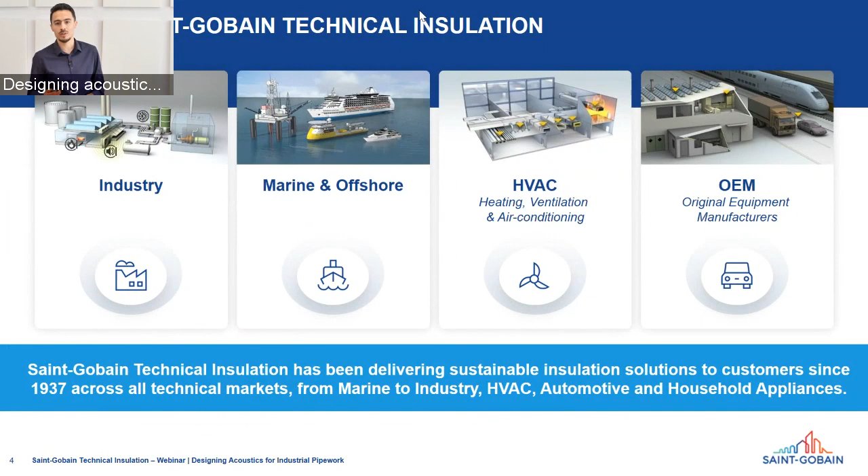Okay, let's start this webinar by introducing our technical insulation central team. We deliver insulation solutions to customers since 1937 across all technical markets, from marine to industry, HVAC, automotive, and household appliances. Today's webinar will focus on the industry sector, but webinars are coming up for all our different markets, so please stay informed through our social media to receive the latest information.

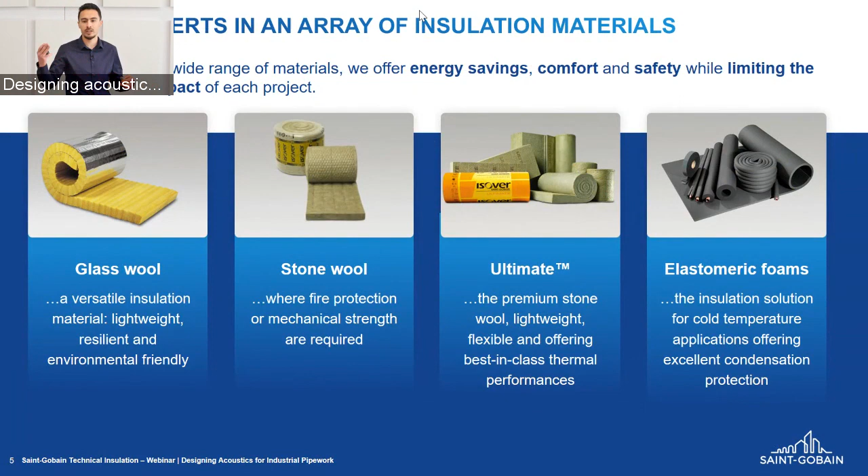We have an expertise in a wide range of materials with a multi-material offer, from glass wool, stone wool, but also our premium stone wool Ultimate, which is lightweight, flexible, and offers the best-in-class thermal performances. More recently, we have integrated elastomeric foam inside our portfolio, which allows us to cover all temperature ranges observed in the industry area, from cryogenic temperature to very high temperature up to 700 degrees.

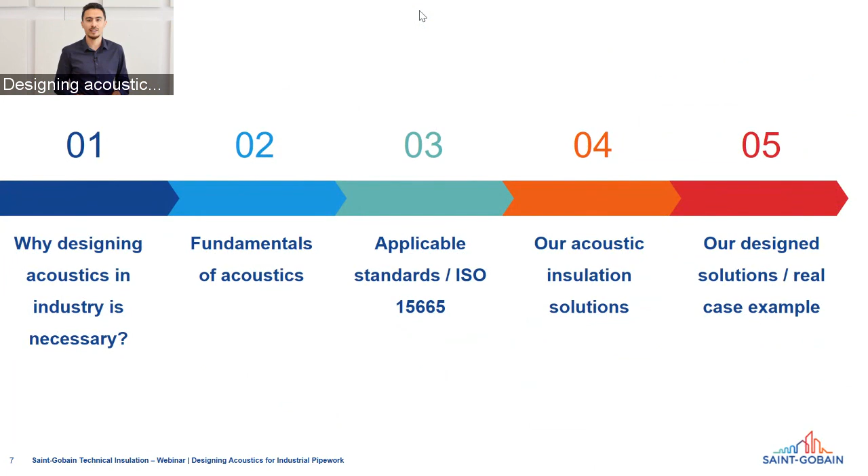Let's discover today's agenda. Parts 1 and 2 will be mostly dedicated to giving you the context of noise control in industry and also some fundamentals of acoustics. Then we will jump directly to the widely known standard ISO 15665. To conclude this webinar, the last two parts will be the right time to share our design solution, but also a concrete and real case study specified by my colleague Edward. I let the floor to my colleague Edward, who will give you more information about acoustics and the fundamentals of acoustics. Edward, the floor is yours.

Thank you, Fabien, for this introduction. Let's start with some first principles. We talk about sound and noise. What is sound? I think everyone recognizes what sound is - listening to good music or watching a concert, it's pleasant to hear and you have a pleasant sensation. But sound can also be annoying, and it can cause an unpleasant auditory sensation, or a badly perceived sound, and then we call it noise.

But why do we have to regulate noise, especially at the workplace? Because if you are exposed to too much noise, it can affect your health - for example, hearing problems or increasing your heart rate. If you are in a too noisy area, it's hard to communicate with each other, not only with talking and speaking, but also you may not be able to hear detection of danger signals, which is quite important in industrial areas. So in general, a noisy area leads to acoustic discomfort, which is tiring for human beings.

So next slide, please.

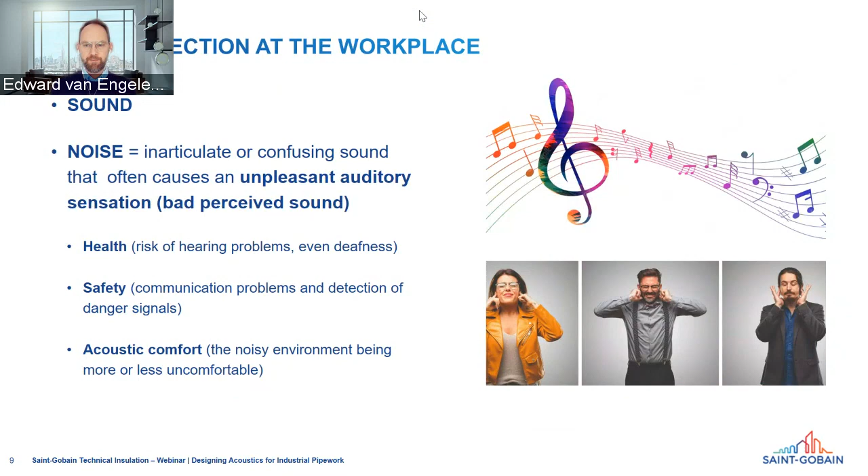So here's an example how to regulate. What are the regulations to control the noise? This is an example from the European Union, which tells us there is a European Union directive which stipulates 3 stages of control of the noise exposure limit in the workplace. It regards the average noise exposure levels to employees, mainly during a specific working day or week.

And there are 2 levels: a level of 80 dBA and 85 dBA. If your exposure level is below 80, you don't have to take measures. Of course, it's possible, but you are not forced to.

If the exposure level is between 80 and 85, then you're in the area of the lower exposure action value, which means you have to take some actions. For example, you have to provide hearing protection to your workers. They are not forced to wear it, but you have to provide it. Another thing you have to do is health monitoring of your employees, at minimum on a 5-yearly basis.

If your exposure level is above 85 at your own workplace, then it's mandatory for the workers to use and wear hearing devices. Some extra actions are also taken into account, which means your health monitoring is not on a 5-yearly basis, but on a 3-yearly basis as a minimum. And you have to place signposting in the noisy areas in your plant or factory.

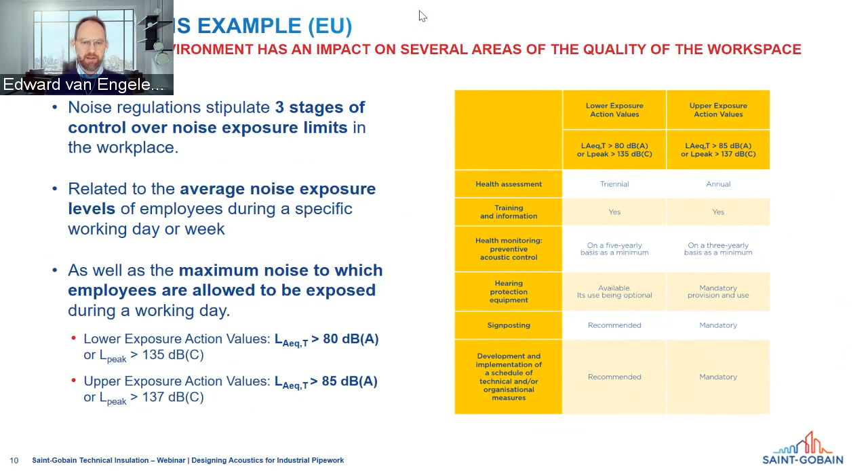The second thing we have to take into account is environmental noise. The European Union has also written a directive to assess and manage environmental noise, which means noise emitted by major sources like road and rail vehicles, infrastructure, aircraft, outdoor and industrial equipment, and mobile machinery. This directive is used by the different countries in the European Union, and it's the base for local legislations which they make in their own countries.

For example, it describes how to use it, such as the exposure period in the day, night or evening. There are maximum exposure levels during these periods, as you can see in the blue field, and noise level exposure from a factory to the surrounding dwellings will not exceed 45 dBA in the evening and at night. So if this level is exceeded, the factory needs to take measures to reduce the exposed noise.

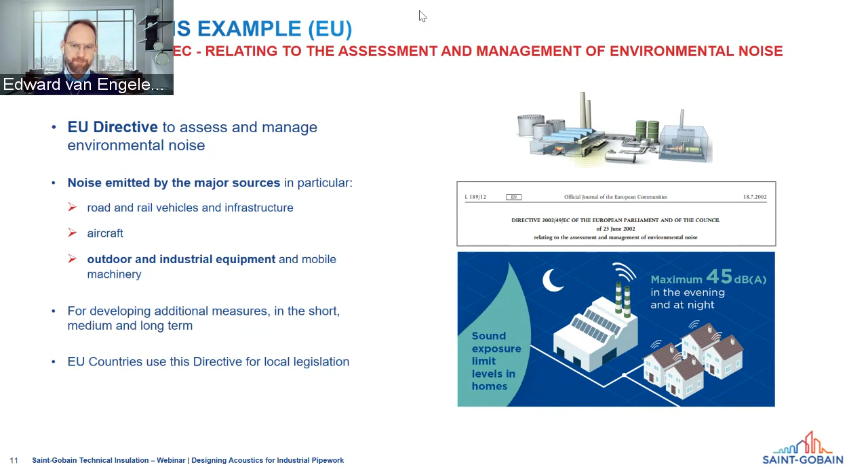So let's step into industry. How to control the noise in industry. The first thing we can consider is controlling noise at the source. The second is controlling noise along the propagation path, and the third one is at the receiver.

It's preferred to control the noise at the source, which means if you have already taken your noise control measures into account at the design stage, you have less chance of needing measures along the propagation path or at the receiver. So if you have to specify equipment, take into account the sound power levels of the equipment, that kind of thing.

If you look at noise control along the propagation path, we talk about airborne noise and structural noise. To control airborne noise, for example, you can relocate the source or place an enclosure around it, add silencers, or absorption treatments in a room, and so on. For structure-borne noise, you could place vibration insulation under machinery, floating floors, that kind of thing.

The last one is noise control at the receiver. That's the last option you can take if measures at the source and along the propagation path are not possible. The most common one is personal protective equipment or hearing devices for your workers. But you can also decide to place a personal protection cabin in a noisy area in which the workers can sit and take rest or do their job.

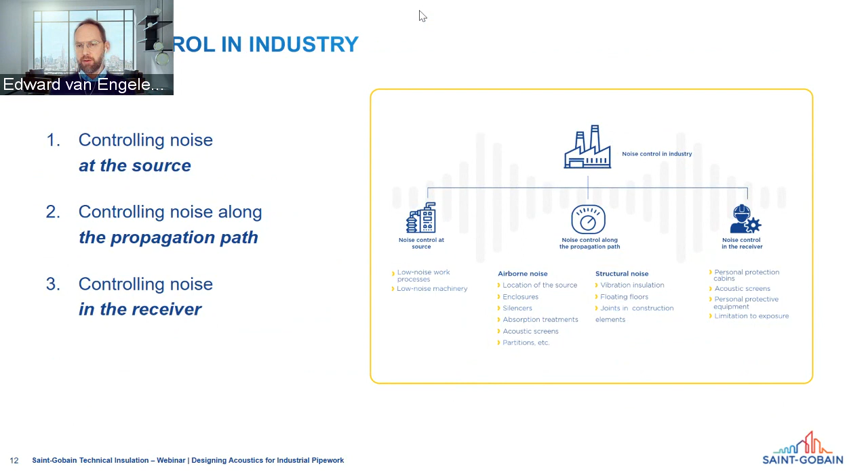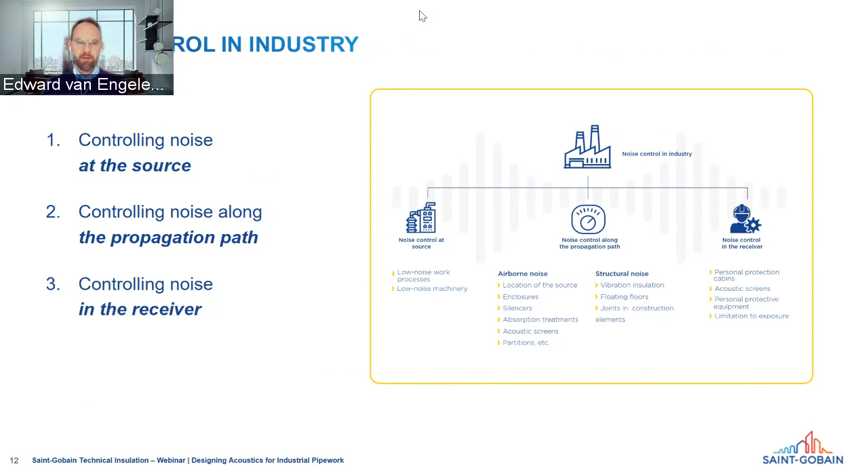Regarding the topic of today, noise control of pipes, it could be in two ways: noise control at the source, which means you are in the design stage of a project, or noise control along the propagation path, which means you have an existing project with a noise problem and you have to place an insulation system around an existing pipe. It's not so important which way, but just to be clear.

So let's start with some fundamentals of acoustics. These are some parameters which are coming up in this webinar later on.

Sound propagation speed, that's the speed of sound in a medium, for example in air, then the speed is 340 meters per second. Amplitude, it's the difference of the pressure.

If you look to the right figure, the yellow one, you see a horizontal line, which means it's the ambient static pressure around us, and you see some waves written on it. On the left side, a low frequency sound wave, you see a long wave, and on the right side, a high frequency sound wave, short waves. And if you look into this figure, you see the amplitude, and the amplitude is the height of the wave. It's the difference between the ambient pressure. The higher the amplitude, the louder the sound is.

And if you look to the wavelength, that's the length of a wave. That's called lambda, and the longer the wave, the lower the frequency sound is. For example, a drilling machine or the beat in music. And if you look to the right picture, you see more waves, shorter waves, which means it's high frequency sound, like someone blowing a whistle, that kind of thing. That's the high tones. In acoustics, we don't use the wavelength to present the tones.

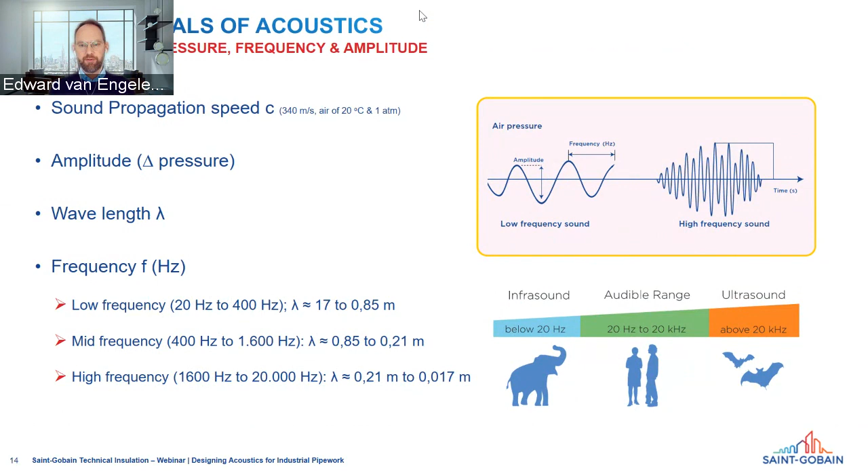Next is the dB level scale, the decibel level scale. Why are we using this? Not only the range of frequency is a big reason, but also our human hearing range. Our ear can hear very little pressure differences to quite high pressure differences, from 10 micropascal to 100 pascal, which means that's a scale of 1 million times. That's a very large scale, and too large to make proper calculations.

That's why the logarithmic scale is introduced, which means to obtain the sound pressure level, we take the real pressure, divide it by a reference pressure, then take the logarithm, and multiply by 20. That gives us the sound pressure level. The reference pressure is 20 micropascal, which is the sound pressure of the auditory threshold of human beings.

If you look to the figure on the right side, as I'm talking now, I think I'm producing around 50 or 60 decibel sound pressure. And if you go up in the figure, you see a starting jumbo jet, then we talk about approximately 130 or 140 decibel, which is quite high and also above our pain threshold. If you are faced with levels above 140, you have a serious chance of losing your hearing system.

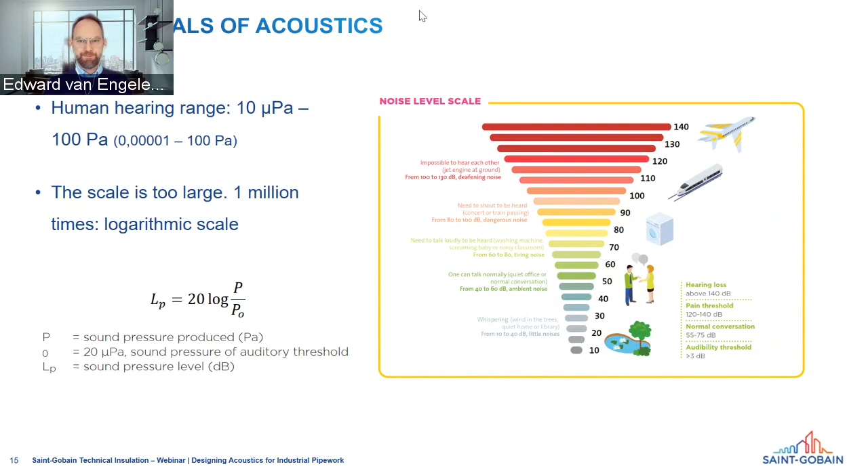We already told that our frequency range is from 20 to 20,000 hertz, which is quite a big scale. If we could only measure frequencies with this kind of big scale, it's very difficult to handle, to make calculations, and to make it viewable. That's why the octave band is introduced.

Octave band is a frequency range defined by a center frequency, and the noise is divided into different octave bands. If you take a look at the left corner, the octave band spectrum, you see from 31 Hertz to 16,000 Hertz an octave band spectrum, with only 10 bars, which means you have a clear picture of the sound pressure level in this figure.

The center frequencies are the numbers on the horizontal scale, for example 125 Hertz, and there's a relationship of 2 to 1 between them, which means the next center frequency is 250, 500, 1000, 2000, and so on.

It gives you detailed information about the different frequencies or tones in a sound spectrum. If you want more detail, very often the 1/3 octave band is used. It's basically dividing the normal octave band by 3, which gives you more information. In this case, it's the same spectrum, but now it's divided into 30 bands, giving more detailed information.

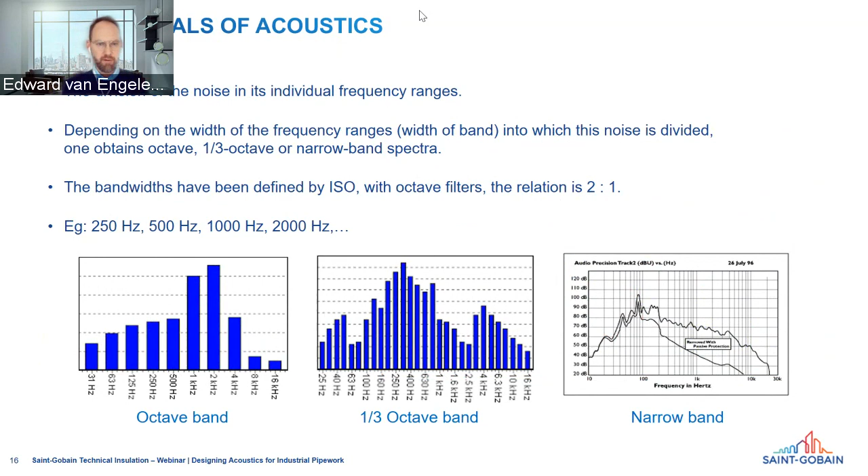For acoustic purposes, octave band or 1/3 octave band are the most common spectra to use. In some cases, when you need to find a specific frequency, a narrow band spectrum will be used, showing you the detail per frequency. But for our case, octave band and 1/3 octave band are enough for this webinar.

Now we step over to mineral wool, the most important acoustic parameters of mineral wool. One of the important parameters is the airflow resistivity. What is the airflow resistivity? It's the ability to reduce the transmitted acoustic energy by reducing the speed of sound in this material.

If you look at the picture on the right side, you see the speed of sound in air is 340 meters per second. When the acoustic energy hits the absorbing material, in this case mineral wool, the speed drops to 180 meters per second. It's depending on the density of the material and also the fiber structure of the mineral wool.

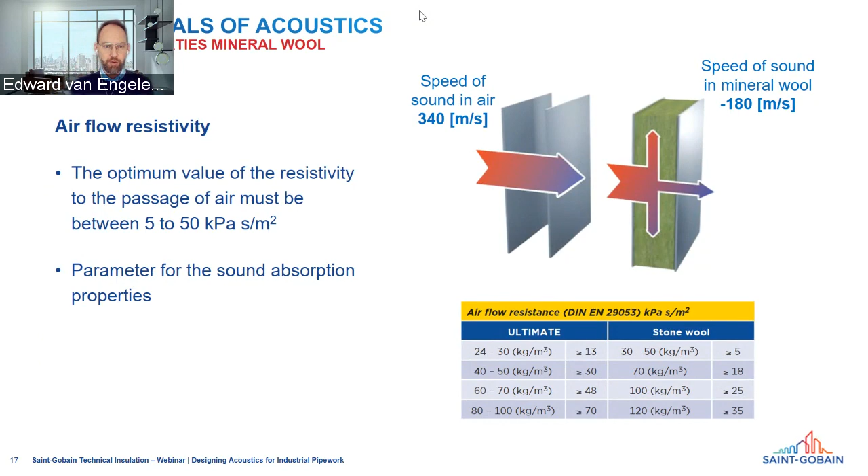The ideal value for a mineral wool should be between 5 and 50 kilopascals second per square meter. If the airflow resistivity is higher than 50, then the mineral wool will act more like a rigid material. This is an important parameter for the sound absorption properties of mineral wool.

The next one is the dynamic stiffness of mineral wool. What is dynamic stiffness? Dynamic stiffness is the capacity of the mineral wool to act as a spring. When it acts as a spring, it's able to absorb noise and vibration.

If you look at the pictures on the left side, you see a mass laid on a rigid material which is stiff. The red one is an acoustic wave coming in, and you can see that all of it is transmitted through this structure.

If you look to the right side, you have the same mass, but now placed on a part of mineral wool, which could act as a spring. Then an acoustic wave comes in, and you see that less acoustic energy is transmitted to the system, which means that this construction is insulating noise and sound.

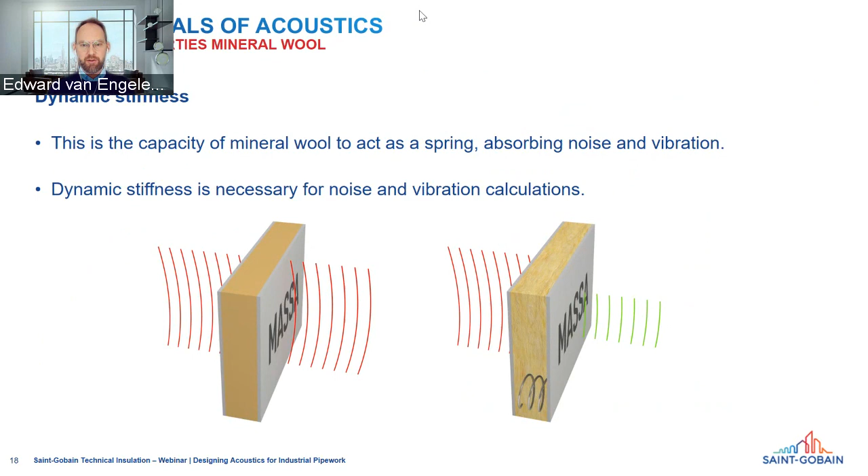This parameter is an important one for designing acoustic insulation systems, also for pipe insulation.

Then we have sound absorption, alpha. What is sound absorption? Sound absorption is the phenomenon that the incoming acoustic energy is hit by the material and is turned into heat, which means it will not be acoustic energy anymore, but heat.

This sound absorption coefficient can be between 0 and 1, which means if the sound absorption coefficient is 0, nothing is absorbed and everything is reflected. And if the number is 1, then all the energy is absorbed into the material.

This parameter is an important one in acoustics, not only in industrial acoustics, but also an important one for the construction market, room acoustics, that kind of market. So it's an important factor and depends on several parameters like the airflow resistivity, the sound frequency of the noise, porosity—here, that's the relationship between the air volume and the total volume of the material—the geometry of the material structure, and the thickness of the material.

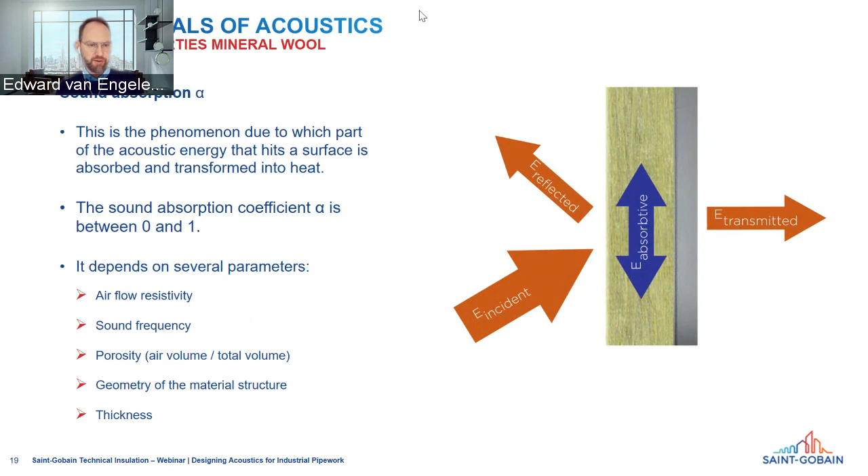Basically, it's a room divided by a partition. The speaker makes noise, and in this sending room, the noise is measured, so there should also be a microphone there. In the second room, after the partition, the transmitted noise is also measured. The difference between the levels of these rooms is the insertion loss.

It's depending on the structure of the partition. In this case, you can see a gypsum construction filled with mineral wool, but this could also be a wooden structure or a concrete part. The difference between the levels is the insertion loss. This is very common in the structural market, but this principle also applies to the industrial market with pipes.

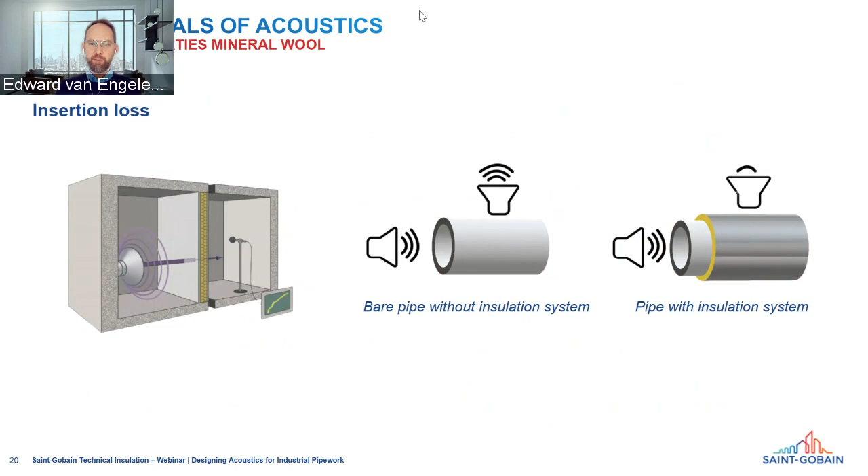This principle, the standard ISO 15665, is based on this principle, and my colleague Fabien will tell you more about this standard.

Yes, thank you, Edward. Indeed, your explanation is the perfect bridge to introduce the ISO 15665, which describes exactly how we can measure this insertion loss.

So what is this ISO 15665 about? It's a widely accepted standard regarding acoustics in industry. It is commonly used for designing the acoustic insulation of pipes, valves, and flanges. It also has some equivalency at the national level, such as the ASTM E1222 standard, or some link with the CINI specification, just to name a few.

But the real specificity of the ISO 15665 is that it allows you to select the correct insulation during the design phase by implementing a standardized classification. It sets target norms to be reached using this classification, namely A, B, C, and D. Please note that class D has been put in place by major companies in oil and gas, like Shell, and it's a stringent additional class to be considered when using this standard.

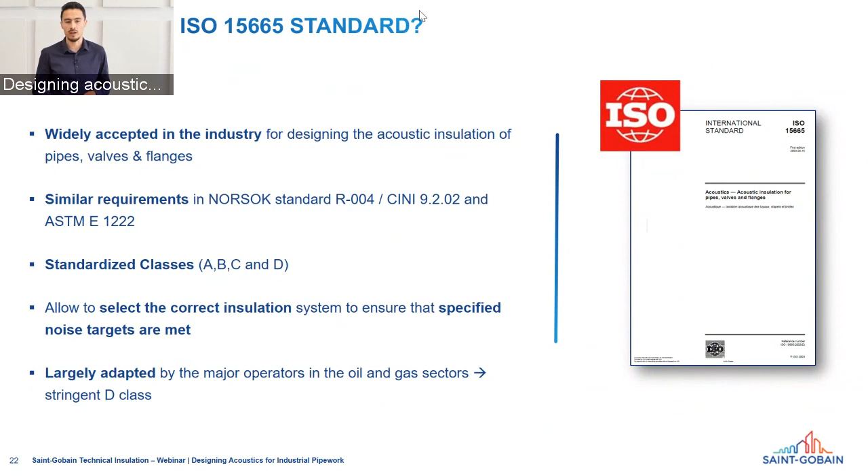Now let's discover the testing method. Basically, we try to define the difference in decibels between the sound power level radiated from a noise source before and after the application of the acoustic insulation, meaning this insertion loss parameter explained by Edward just before.

For this, there are three different rooms in the lab. We have room 1, where the loudspeaker unit is placed. Then room 2 in the middle, where the measurement will be made — we also call this the reverberant room. And finally room 3 on the right side, where you have the anechoic termination.

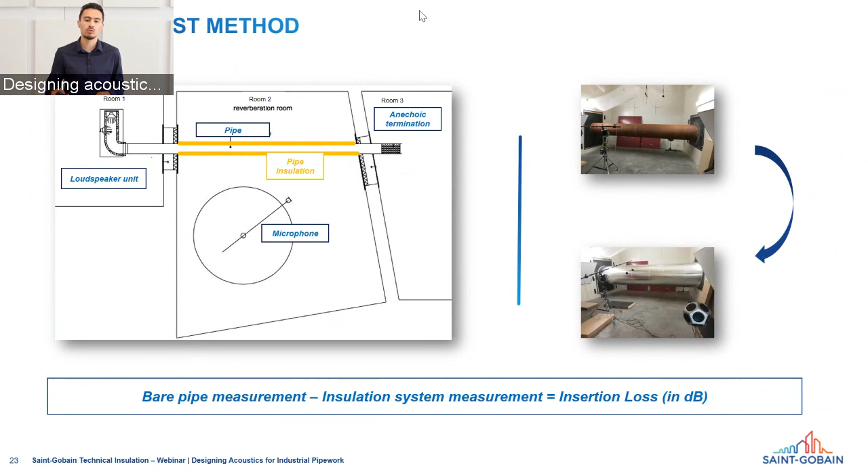Basically, the pipe runs through room 2, and the acoustic insulation is placed in this room — I've tried to define the insulation in orange here. To perform the test, we measure how much sound is radiating off the bare pipe, then we run the same test again but with the insulation system applied. By comparing and subtracting the result from the insulated pipe, you obtain the insertion loss in decibels, meaning the reduction of the sound level of your total system.

Now let's see how to use the ISO 15665 classification. These classes are mainly dependent on two main parameters. First, you select your pipe diameter class: 1, 2, or 3 — class 1 for pipes under 300 millimeters, class 2 for pipes between 300 and 650 millimeters, and class 3 for pipes between 650 and 1000 millimeters. Then you associate this diameter directly to the performance, namely your insertion loss: A, B, C, or D.

For each octave band, the standard sets minimal values per frequency, and using this insertion loss value per octave, you can draw the reference curve. You have a good example on the right side of the screen, showing the reference curve for class 3.

Please notice the specific class D coming from Shell, as mentioned before, is only valid for class 2 and 3, not class 1, meaning for pipe diameters between 300 millimeters and up to 1000 millimeters. The ISO 15665 standard itself is only valid for pipes up to 1000 millimeters. Above this specific diameter, only design or simulation can be used to ensure that you meet the reference curve.

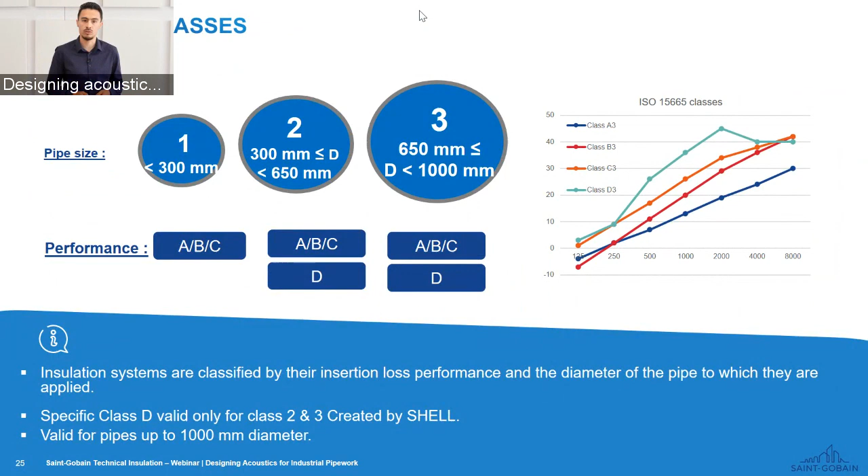Here you have a table with all the values from the ISO 15665. This is the insertion loss in decibels. So to reach a given class from the ISO 15665, you need to satisfy all these values.

Let's take an example here: a pipe diameter of less than 300 millimeters. To reach A1, it must satisfy the requirements shown in green on your screen. To reach B1, the requirements in blue, and finally, as you understand, the red ones to meet the C1 class.

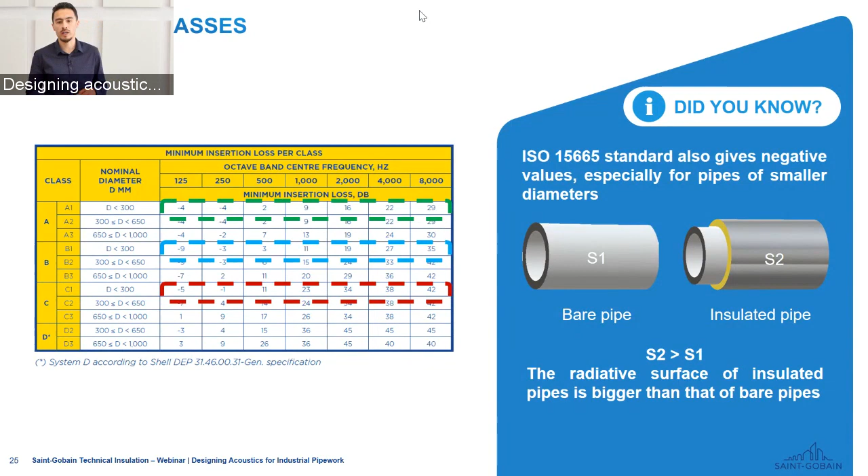Maybe you have noticed in the table that you have negative numbers between 125 Hertz and 250 Hertz. Why? Because with an insulated pipe, the surface per square meter is bigger than with only the bare pipe, meaning the radiative surface is bigger. And that could have a negative effect on the acoustic performance by increasing the pipe surface. You can observe this phenomenon, especially for A1, B1, and C1, where there is this negative number.

Okay, now we have a good understanding of the applicable standard, ISO 15665, and how to measure the insertion loss of a specific system. Let's discover the practical solution coming from Saint-Gobain.

So you have on the screen an extraction of the table for class 1 and 2 pipes coming from our acoustic industry brochure. These two tables give you all the details and results for these two specific classes. The purpose of this table is not to bother you with a lot of detail, but just to show that we cover a wide range of products and solutions to fit most of the possible projects you can face in your daily business.

One key piece of information: all these configurations have been tested by third-party laboratories and reports are available upon request.

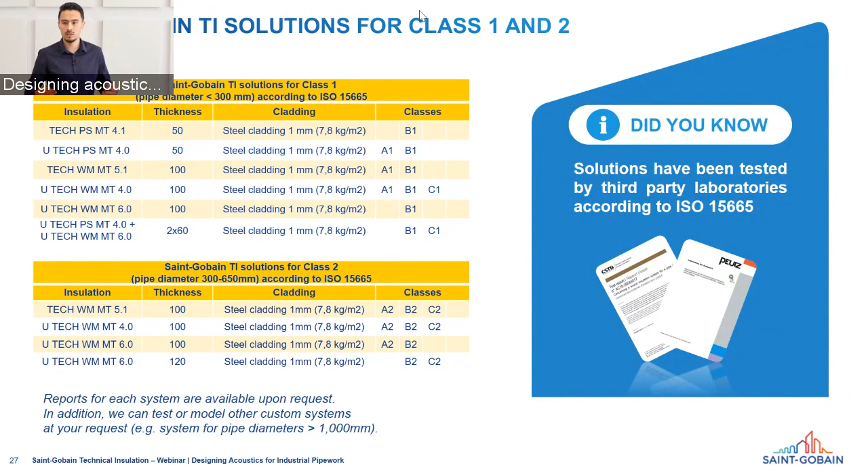In addition to that, thanks to the know-how of Saint-Gobain, we can model specific systems for specific needs. Let's take an example of a pipe diameter above 1000 millimeters. We can model that. Let's think about a new mineral wool thickness. We can also model such a configuration.

Now let's focus. We have seen class 1 and 2. Let's focus on the class 3 pipe, meaning pipe up to 1000 millimeters and reaching the D3 class.

So the composition of the acoustic system is as follows. First, a porous layer from mineral wool insulation, which absorbs the noise coming from the pipe. Then we have a mass layer, also called an anti-drumming layer. In a certain way it's a barrier to the noise, as explained by Edward before, creating a kind of damping effect. Then we have a closed cladding, which is another barrier to the noise, but its main objective is, of course, to protect the porous layer, here the mineral wool. This cladding could be aluminium or even steel.

Why have we included spacers all the time? First, because we wanted to know the real impact of the spacer and how we can improve or counter this possible effect. Second, because we wanted results representative of a real situation, since we know that for some configurations we need spacers, for example with wired mat, especially Ultimate, to handle the load of the cladding. So we need to test the configuration with spacers. And the third point is because we want to secure the long-term performance. If only the porous layer handles the load of the cladding, we know it could, in a certain way, affect the performance of the whole system.

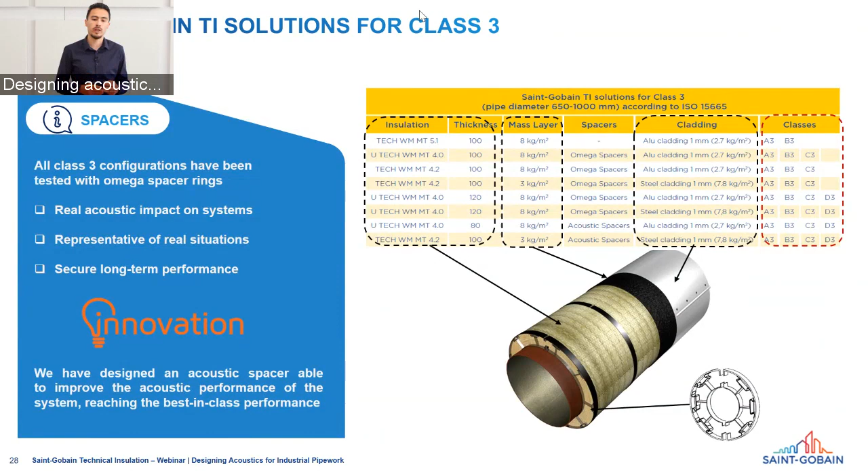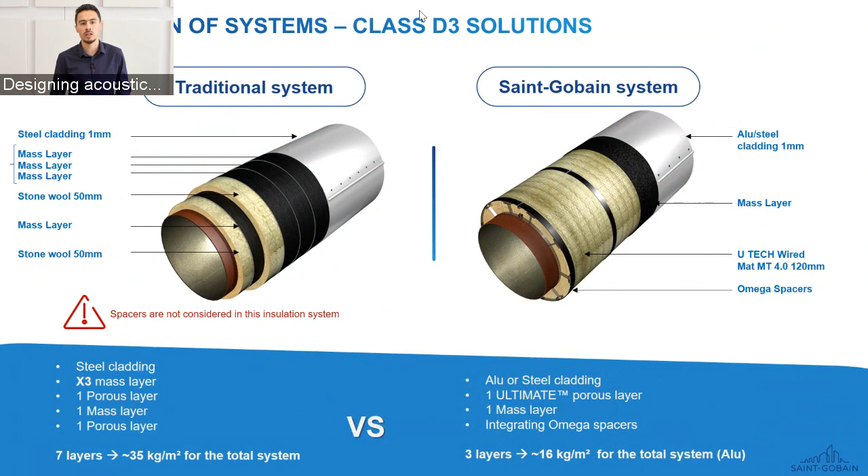Second point: prefer real tests, including the spacer, because even by choosing a traditional system, you are not sure to achieve the class mentioned, since here you don't have any spacer included in this traditional system.

Now, let's compare the test result obtained on a real test report versus the ISO 15665 generic classification. So again, to reach a class, the insulation material or system needs to meet or exceed the reference curve.

That means for a specific project, this precise data can be considered. I just invite you to contact your local representative to get the best possible solution depending on your project constraints.

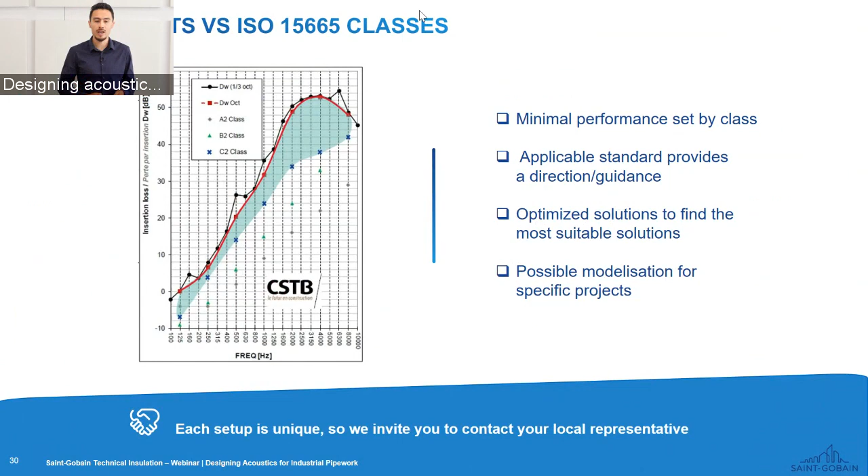And by the way, I will now let the floor to my colleague Edouard, who will present a real case study, and you will see how it's perfectly aligned with the designed solution offered by Saint-Gobain. Edward, the floor is yours.

Thank you, Fabien, for this part of the webinar. I'm going to show you a project which we have done in the Benelux, regarding noise pollution in the surrounding of an industrial plant.

In this case, objectives came from complaints by local residents. An acoustic engineering company was hired by the plant owner to investigate the location of the source and propose potential measures which needed to be taken. We, as Saint-Gobain ISOVER Technical Insulation, supported the plant and the contractor to select the most suitable insulation solution in this case. Next slide, please.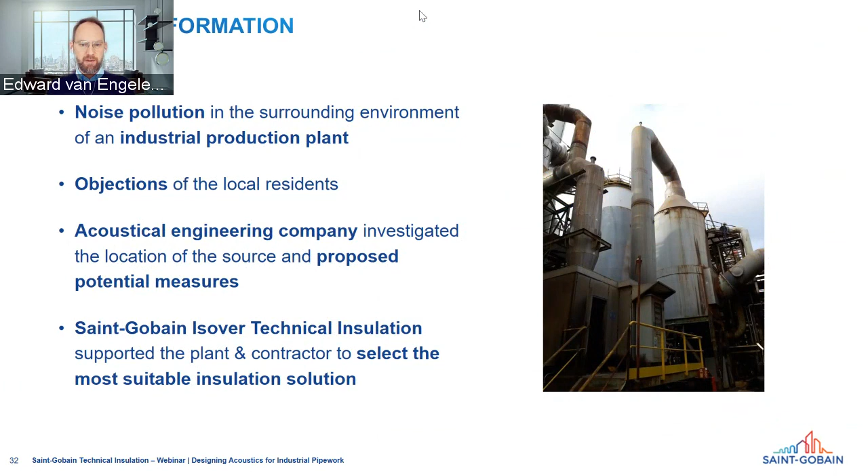The first step was to take sound emission measurements in the surrounding, by the dwellings. This was done by the engineering company, and they discovered that audible tones at 800 and 1600 hertz were measured at these dwellings.

They did the measurements in 1/3 octave frequencies, and it resulted that the sound levels at the dwellings were from 37 to 46 dBA, due only to these tonal components at 800 and 1600 hertz, meaning an exceeding of 6 dBA minimum in the night period.

And it was already strongly suspected that an industrial fan at the plant could be the main source of this noise pollution. Next slide, please.

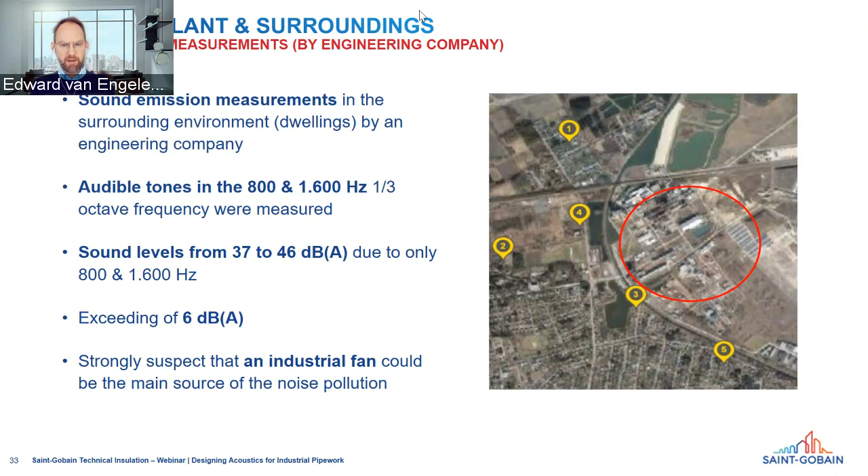So the next step was to verify the source in this plant. The engineering company took sound intensity measurements at the suspected fan installation, and they measured the noise enclosure and the engine with a sound power level of 90 dBA, the inlet piping...

...with a sound power level of 119, the outlet piping 118, and they also took measurements in the surrounding of the installation - the oil tank and appendages - but these had no contribution. So the total sound power level of this fan was 122 dBA, but the main sources of the noise were the inlet piping and outlet piping, with levels of 119 and 118 dBA.

So the next step was to make the verification: is this the source that causes the noise pollution in the surrounding? The engineering company made a digital model to predict the sound levels at the dwellings, using this source data as input.

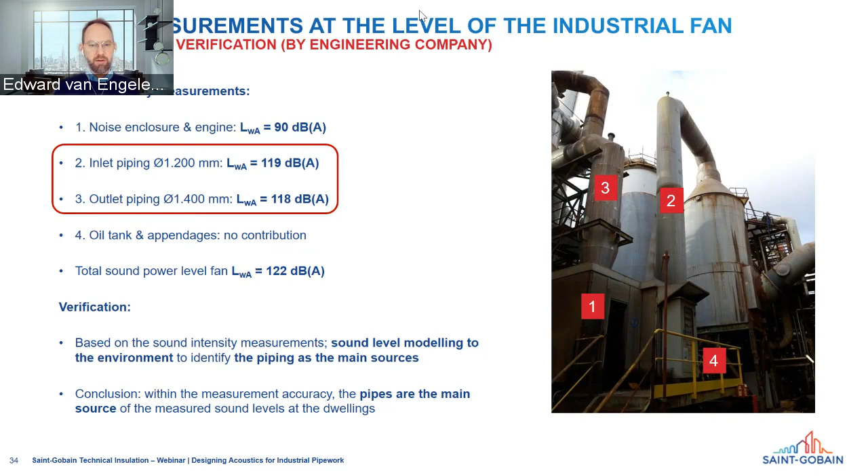And the conclusion was that, within the measurement accuracy, those two pipes were the main sources of the measured sound levels at the dwellings. So the source of the problem was found. Next slide, please.

So the engineering company specified an insertion loss for the pipes that they had to take measures around, with a minimum performance of insertion loss per octave band. They didn't use the standard. They decided to give a spectrum per octave band, a dB value per octave band.

And at the time that we stepped into this project, there was already an existing proposal with wired mats, stone wool wired mats, and a combination with mass layers. As you can see, it looks quite the same system as Fabien presented. It's a mineral wool with mass layer, again a mineral wool layer, and then 3 mass layers and a steel cladding outside, which is a quite heavy system.

The weight was also one of the barriers in this project, because due to the weight of this insulation system, the loads on the pipes and some parts of the existing construction became too high, which meant they had to place extra support construction, and also rings were needed due to the high weight of 39 kilograms per square meter. Support rings were needed because of the strong weight of the insulation system, and because of this weight, the rings needed to be welded at the piping for carrying the whole insulation system, which is quite complex in this case. Also the thickness of 150 millimeters was quite big, because not everywhere was this space available around these pipes.

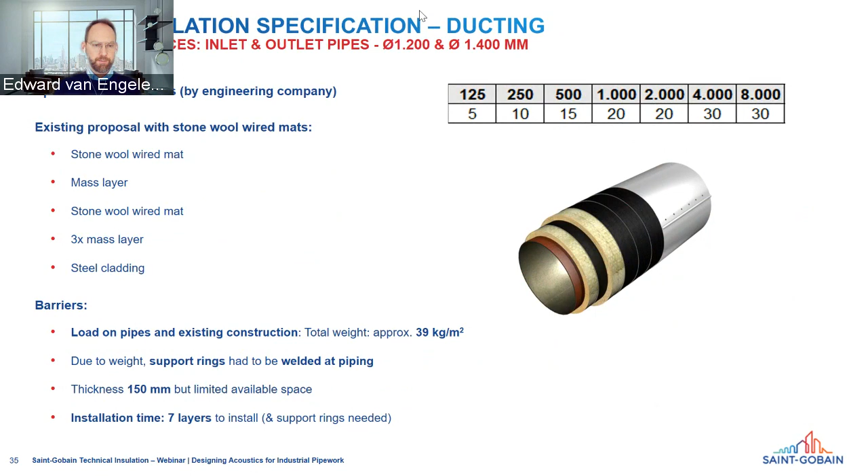So we decided to go for an alternative. And to reach this, we made several calculations with different insulation systems. We took the 1/3 octave frequency spectrum from the engineering company, and we made calculations with several systems.

We decided on a system with ultimate mineral wool, 100 millimeters, including omega rings, which was tested in this setup because we know the influence of these rings on the final performance, and an aluminium cladding including a mass layer glued on the inside of it. This means we reached a lightweight application of approx 19 kilograms per square meter, compared to the proposed one with stone wool wired mats. It was 50% less weight, and also 100 millimeters instead of 150 millimeters.

As already mentioned, this system was tested including omega rings, and these rings were also needed for this system, so we know the effect.

The last thing we had to check was the validation of this test, because these pipes, the inlet and outlet pipes, 1.2 and 1.4 meters in diameter, are bigger than 1 meter. So we did a check at our research center of Saint-Gobain. They modeled the system, and concluded that the measured values are valid for this kind of system and diameters.

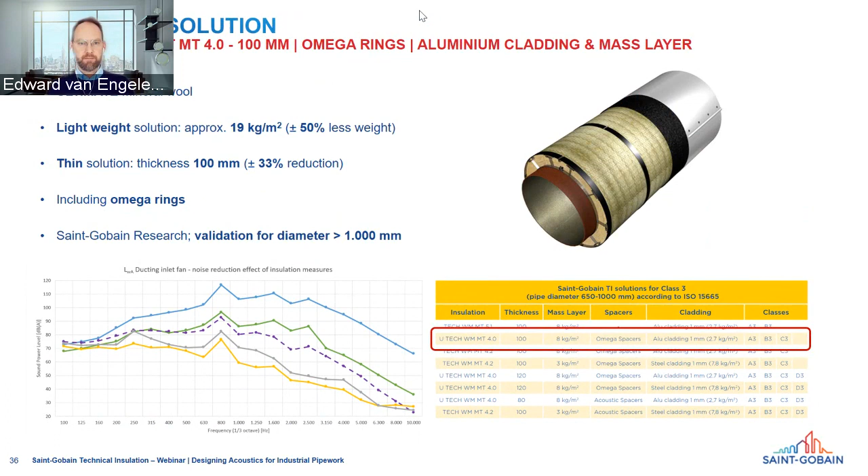So we delivered this system, and it was installed by the contractor. After the installation, the engineering company took measurements in the surrounding dwellings, and they concluded that the sound levels at the dwellings now fulfill the legal exposure levels. So that's point 1, but also the tonal components disappeared, and the problem was solved.

This resulted in the local residents withdrawing their objections in this case, which was quite a relief for the plant owner. If you look a little further for sustainability reasons, then you can conclude that this system, compared to the first proposed one, has...

60% less use of raw material due to the weight of the raw material, and also less waste on site, meaning plastics, pallets, etc., because you have to use less materials.

Then from the contractor's point of view, safety, installation and construction: we had a minimum installation thickness of 100 millimeters instead of 150, and also 4 to 5 layers less to install compared to the proposed system, and no additional mass layers in the field they had to install, which meant they also had less shutdown time for the installation, because the installation was quite faster compared to the traditional one.

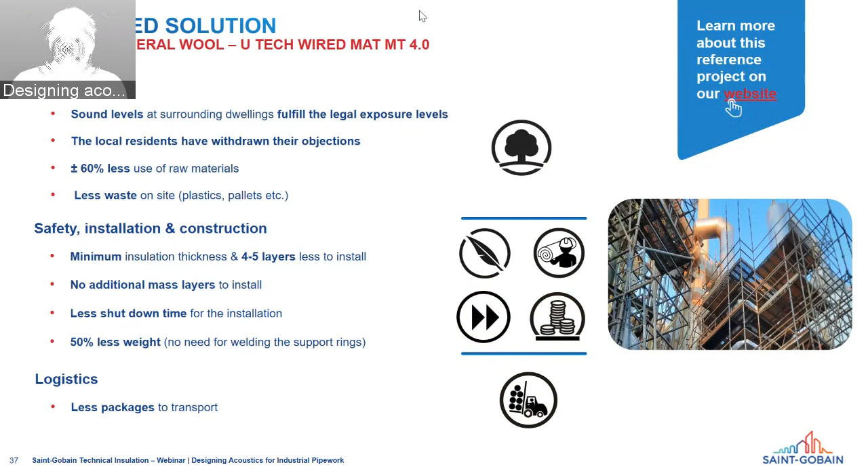Also, the total weight is 50% less compared to the traditional one, and there was also no need for welding the support rings in the construction. They could clamp it around the pipe, which is also an advantage in this project.

And the last one, the logistics: due to the use of less materials, there was also less packaging to transport, not only in the truck on the road, but also less packaged materials to transport over the scaffolding in the field, which means it's a safer installation in the end.

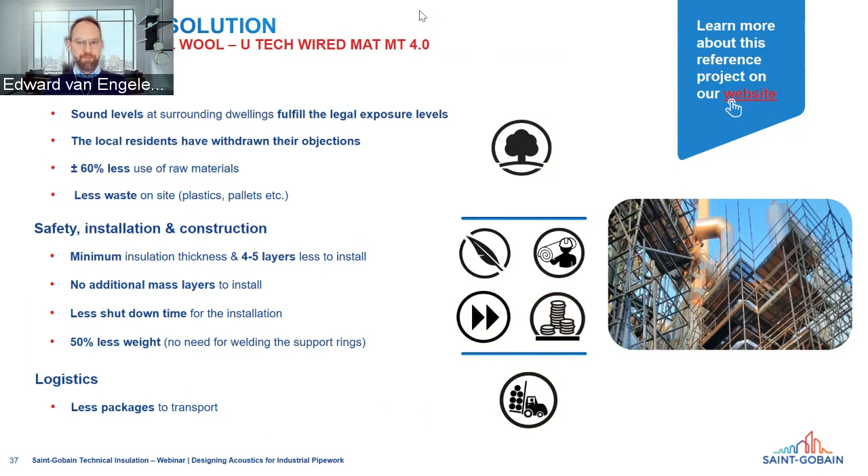As a conclusion of this webinar, let's see the good reasons to choose a Saint-Gobain solution. First, the lightweight, which has been perfectly described during our session and confirmed by the real case of Edward. We are 50% less weight in terms of weight than the traditional system, and we have minimal layer. It's easy to install and better in terms of logistics.

Third-party verified: all our tests have been made in a recognized third-party laboratory. Best-in-class solution: we have reached the top-class D3. Real case solution: for each configuration, we have designed our solution to be representative of a real situation. A good example is here for the spacers, considered for all tests. And finally, tailor-made solution: we provide optimized solutions for designers with a full range of tests and modelization on request to fit most of the project constraints.

In addition to this, we have also created a specific acoustic selector that allows you to choose the best configuration for your project. I invite you to check the technical insulation website.

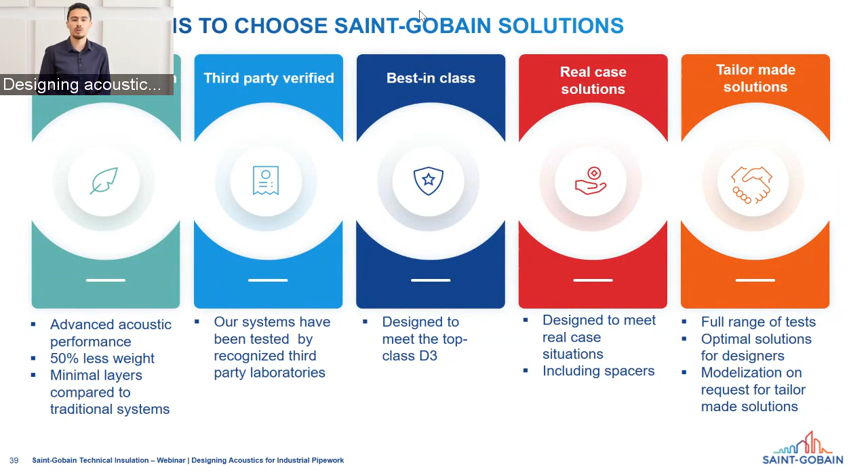Okay Edouard, we have a first question. I think I can take this one. Thank you for this webinar. You include the Omega spacer rings into your system—does Saint-Gobain sell these Omega spacer rings, Omega rings?

No, we do not sell Omega rings as Saint-Gobain. There are several manufacturers and suppliers of this kind of material, and it mainly depends on the country—each country has different suppliers for this. On this question about Omega rings, I don't know if you noticed, but I mentioned one specific innovative spacer. For you to know, we have designed at Saint-Gobain a specific spacer that not only has no negative effect on acoustics, but even a positive effect on the acoustic result. I invite you to learn more about this design spacer by contacting your local representative.

Let's check if we have another question. Did you test glass wool systems also? Edouard, I think you can take this one without any problem. Yes, we did. As Saint-Gobain, we provide multi-material solutions: glass wool, stone wool, and Ultimate. We did test some acoustic performance of glass wool systems, but the main focus, the first focus, is on stone wool and Ultimate.